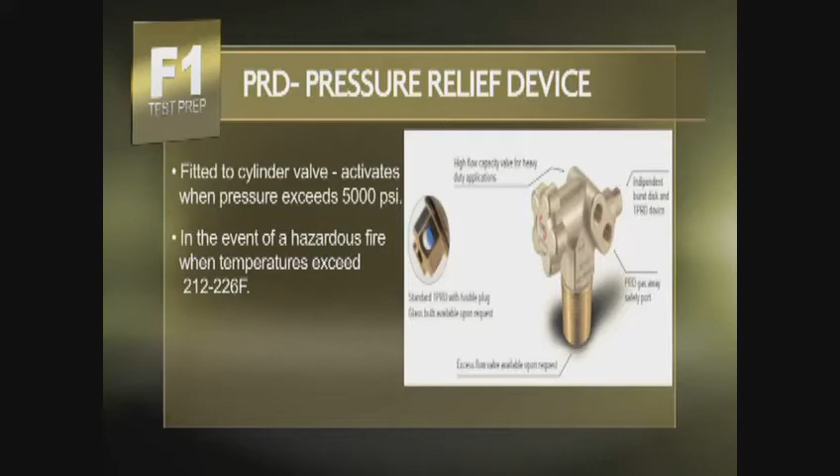So I have two actual pressure relief devices that are on part of the valve. One has to do with pressure, the other has to do with heat. It's all designed to get rid of the pressure in the tank and allow it to go to the atmosphere. Sure, there's a fire going on, but what would you rather have? A little extra flame or a big boom that can do more damage to people? I think I'd rather have a little extra flame myself.

Okay, tank venting. Now, if the tanks are underneath the car, tank venting, no big deal. We can just let them vent. But if it's actually mounted inside a passenger compartment, like behind the back seat or in the trunk area, then we actually have to run vents outside the vehicle. So, venting the tanks outside the vehicle, the slide that I have here actually shows the tank vent coming from inside the vehicle outside, and then it also shows a 90-degree manual shutoff valve for shutting the system off.

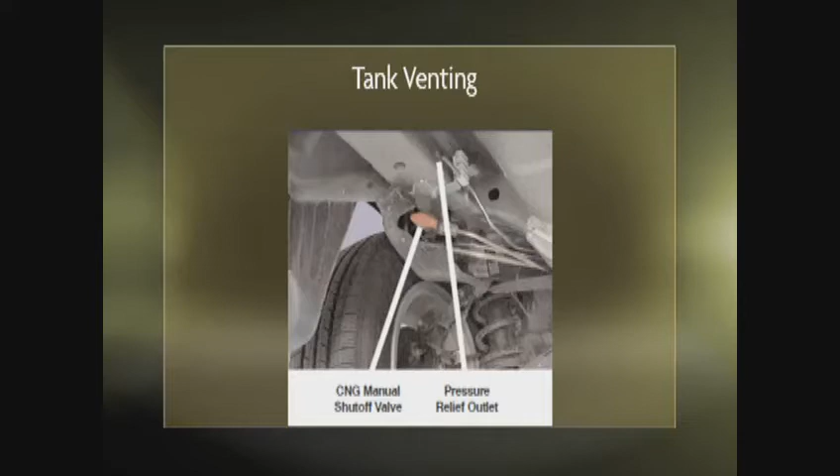On this picture, you're reaching through the wheel well right behind the left rear tire to go in and hit the manual shutoff valve. Another type of manual shutoff valve here shows an actual panel. You cannot have them locked. You can't use a tool. You can have it to where it uses a latch to keep it shut, but there can't be anything to lock the panel to get to the manual shutoff. So it has to be a quarter turn type or a ball, and it has to be clearly marked with red, blue, or black letters on a white or a silver background.

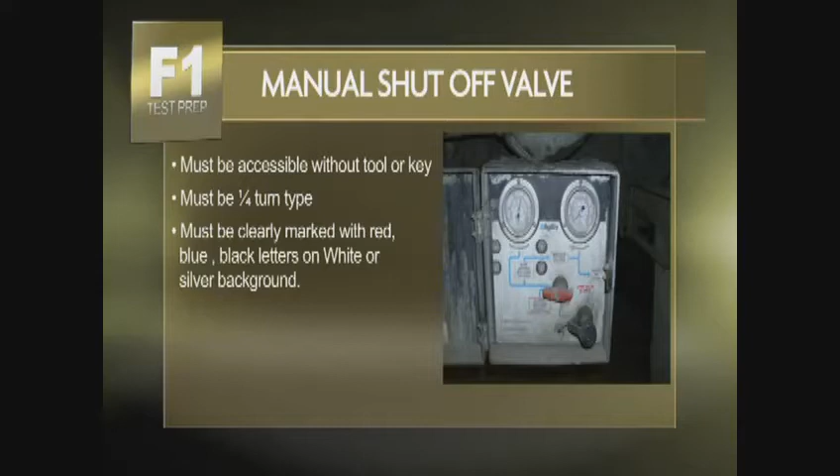As you can see, this panel here also has gauges on it to show the high pressures and the low pressures of the system while it's operating, and it does include the fill for the vehicle too. So you could have something as complex as what's shown in the slide here. You could have something that's just where you reach through in the fender well to turn it off.

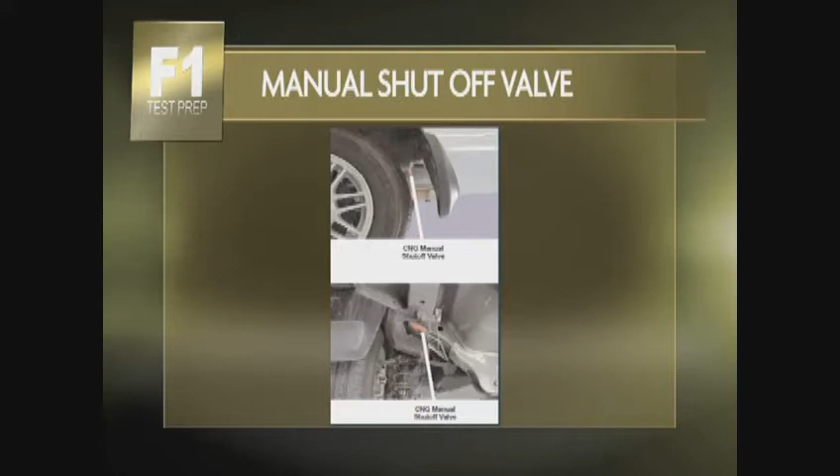Here's another picture showing the manual shutoff valve and showing the accessibility from the outside, again from underneath. But from the outside, basically you'd be reaching through. So if something was supposed to happen and you needed to actually turn it off, or you had a major leak under the hood, you could just reach in behind the wheel there and shut the system off and not have to worry about it venting out. If you were doing an add-on system, here's a manual shutoff valve, something as simple as that, just as long as it's a 90-degree type, but this is another type of manual shutoff valve.

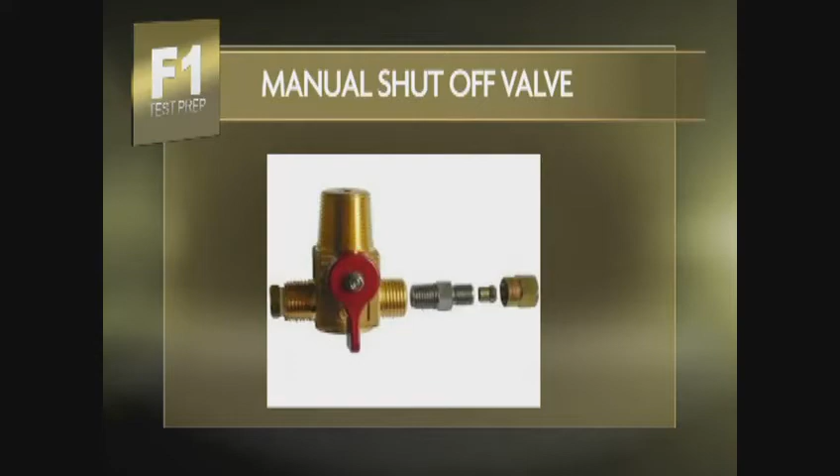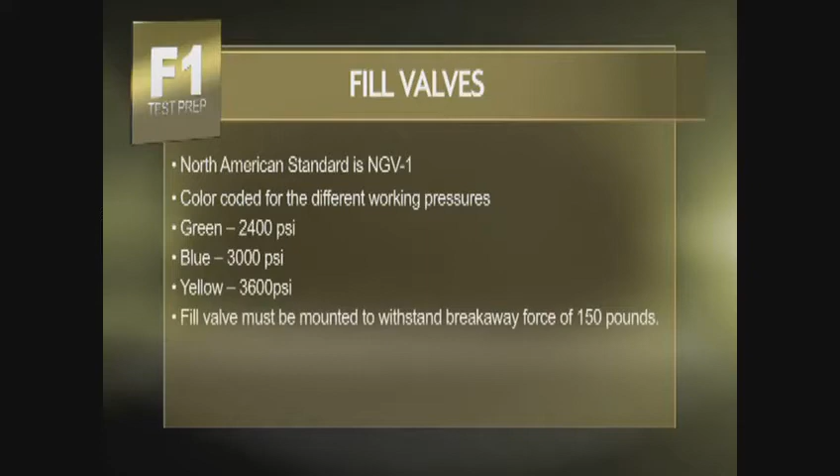Now, fill valves and filtration. First on fill valves. All fill valves in North America follow NGV 1 standards. That's clearly marked on the actual filling port itself. They're color-coded for different working pressures. Green is 2,400 psi, blue is 3,000, and yellow is 3,600 psi. The fill has to be mounted to withstand a breakaway force of 150 pounds. The hoses that you use for filling it up have a breakaway support on them that is set at 150 pounds. So it would make sense that this has to be mounted to withstand 150 pounds.

If you decide to drive away while you're hooked up to it, at least it has to be able to withstand 150 pounds of force. That way the hose will break off and it'll put the safeties into effect that are built into the hose, instead of you breaking off the fill port and now you're emptying a tank that has 3,600 psi in it. As far as filling it, you have to have enough clearance to allow the nozzle to hook up on the vehicle.

So when you're thinking about where am I going to put this fill valve in doing a conversion, keep in mind I have to make enough clearance to where I can actually fit my fill to plug it up in there. So if I wanted to put it in where the fuel door is, there might not be enough room for this valve to fit, so I might have to put it in some other area, whether it's outside the vehicle on the side or even under the hood. No matter where you put the fill valve, it has to be able to withstand that 150 pounds of force. The other thing to keep in mind is you always want the little cap to fit on there to keep all the dirt out so we can actually utilize it properly.

On filtration, the main concern is moisture and oil from compressing the natural gas. Just like with an air compressor, when you compress air, do you get moisture out of the air? The answer to that is yes. Same thing. The way the compressor works to compress the natural gas, there is always going to be a little bit of moisture there. There's going to be some oil from the compressor itself. That oil gets transferred to the gas and can actually end up in the tank.

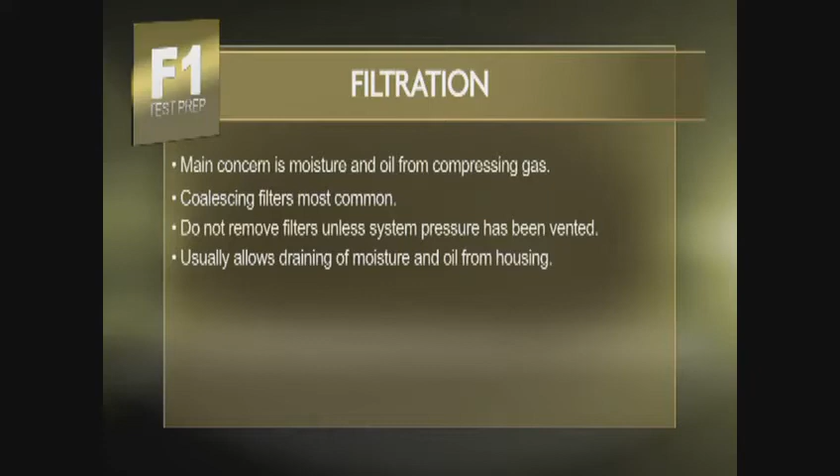The other thing to keep in mind about filters is when you go to service the filters, you want to make sure that the system has been vented all the way so there's no pressure on it. So it is important to make sure that you vent the system before you service a filter. But if all you want to do is drain out the oil and water accumulation, there are drains built in where you can just open that up and allow it to drain out without having to take the filter off completely. So that's the good thing about that. Next, we'll be talking about pressure regulators.

Okay, now we'll be talking about pressure regulators and fuel mixers. First thing I'm going to talk about is the pressure regulators. We have three basic types of regulators that are used. We have a multi-stage system where one regulator takes the tank pressure down in 2 or 3 stages to slightly above or below atmospheric, depending on the engine RPM.

Another type is a 2-regulator system. We have a high pressure regulator. It reduces the tank pressure down to about 70 to 180 psi. A low pressure regulator then takes it down in a couple stages to where we measure it in inches of water with a manometer.

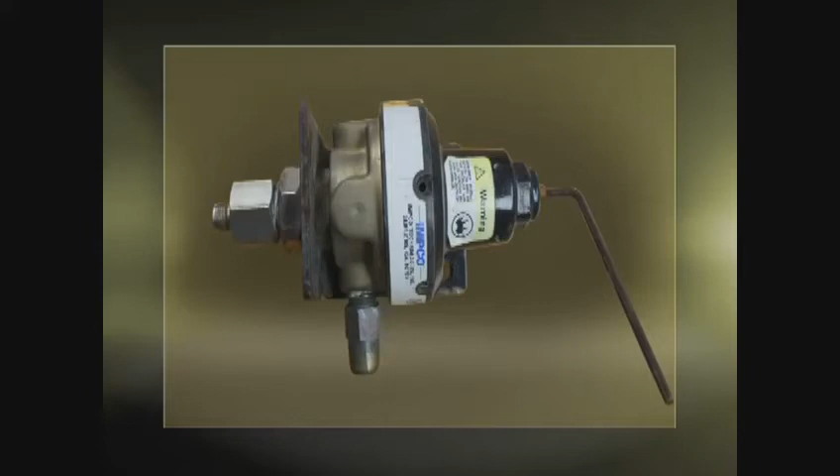The next is a single stage system that drops the pressure from about 3,600 psi down to about 40 to 130, which allows us to use a valve body and injectors to inject it into the engine. So the type of system we have determines the regulator type we use. This is a single stage regulator here that took the system down from our 3,600 psi to a usable pressure of about 40 to 130 psi.

Air fuel mixers, we have several different types. First is an air valve type mixer that can be located above the throttle plate, or we have a Venturi mixer, which works roughly the same way. But we can make these a closed loop system. The way this works is basically on demand based upon how much air has entered the engine. It goes through the mixing valve and makes a diaphragm move, which allows more fuel to go in according to how much air is going into the engine.

Next, we have a throttle body system. Same thing as throttle body fuel injection, except we're going to have a throttle body CNG injector that sits above the throttle plate. We inject the natural gas, and as it goes by the throttle plate, the gas and the air mix together going into the engine. That is a speed density based system, and works pretty much the same way as the speed density throttle body injection systems we had in the 80s.

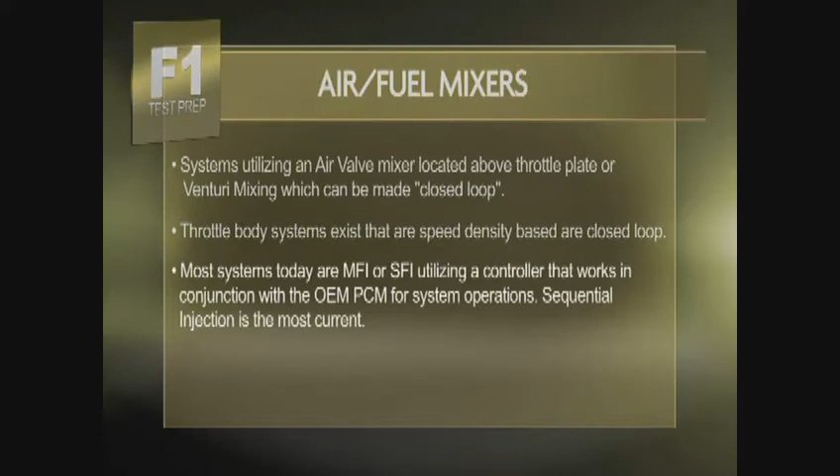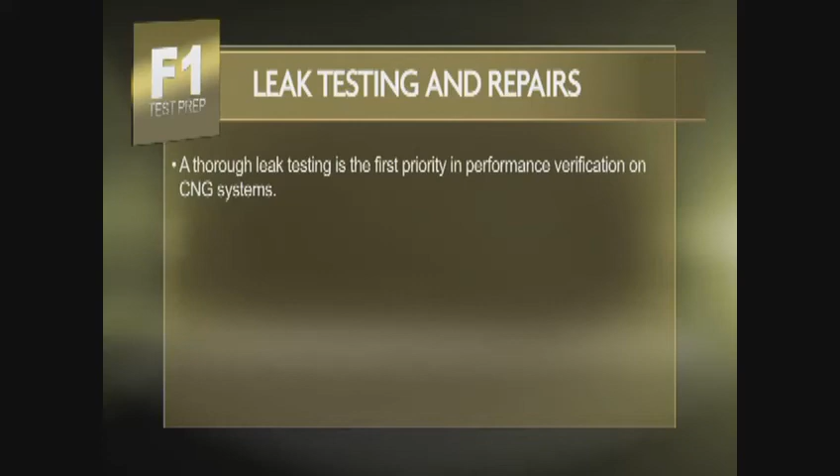Now, leak testing and repairs. Thorough leak testing is vital to the performance of any CNG system, okay? All leaks that you find have to be repaired. The complete system needs to be tested using natural gas. If you ever have to replace a tank, they have you do some things so you can do initial testing without using natural gas, but any final leak testing needs to be done using natural gas at the pressure of the system itself.

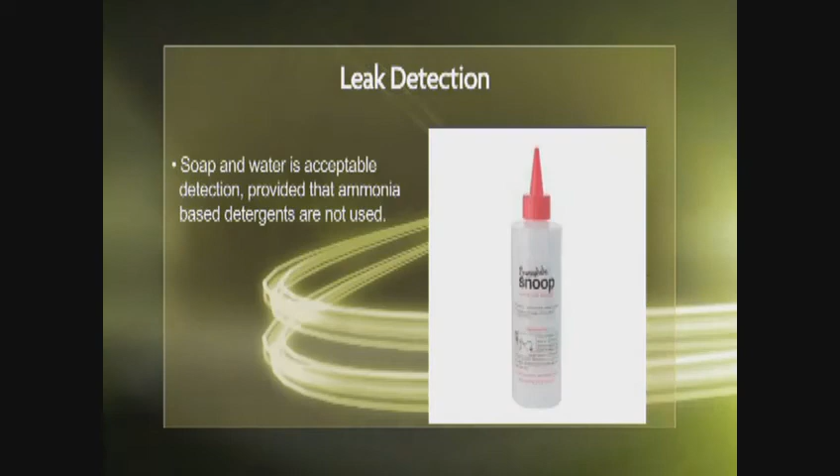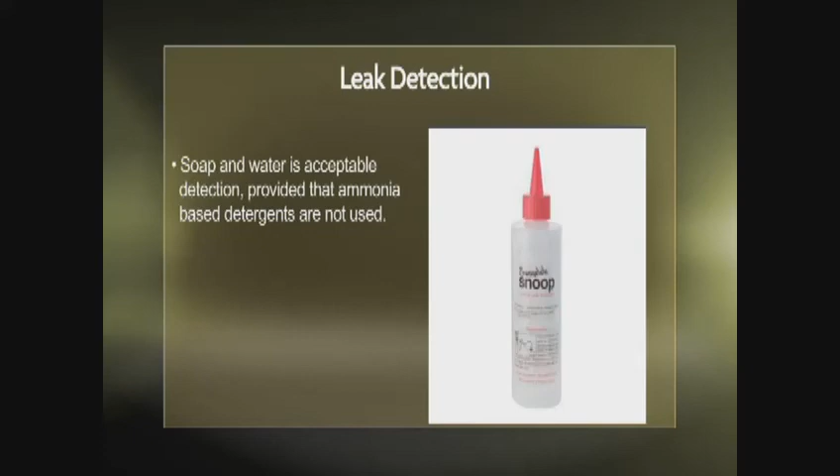The first type of leak detection, the most common and also the most popular, is soap and water. As long as the soap is not ammonia-based, you can use it on the system. Keep in mind, if it is ammonia-based, it's going to be corrosive to the fuel system you're putting it on, which isn't very good. The picture here shows Snoop. This actually changes color when a leak is detected, so it's an additional aid. But if you're just using regular soap and water, you're looking for bubbles. If there are bubbles, there's a leak, so you don't want to find any bubbles.